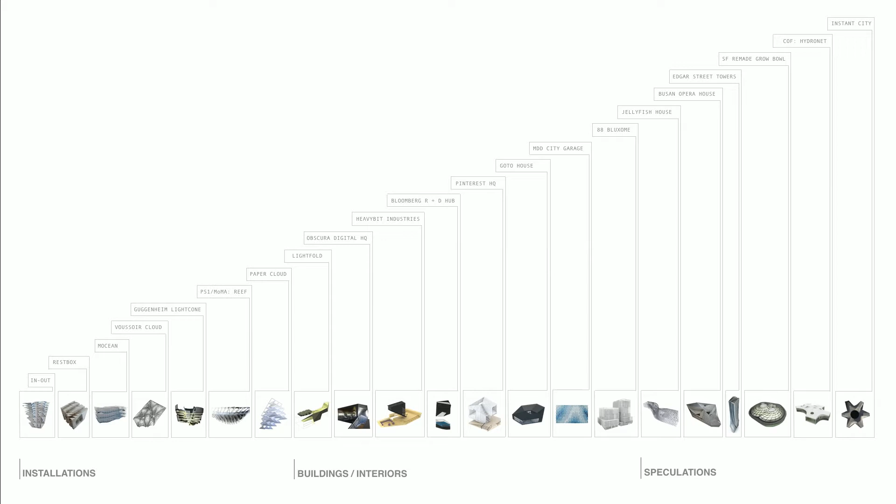And at the other end of the spectrum, the speculative projects, which gave us a chance to experiment with spatial and formal ideas which we didn't have a chance at that time to realize in built work, as well as larger scale urban proposals. So those two forms of research are now making their way into our buildings and interiors projects. We'd like to talk about 5 of those projects.

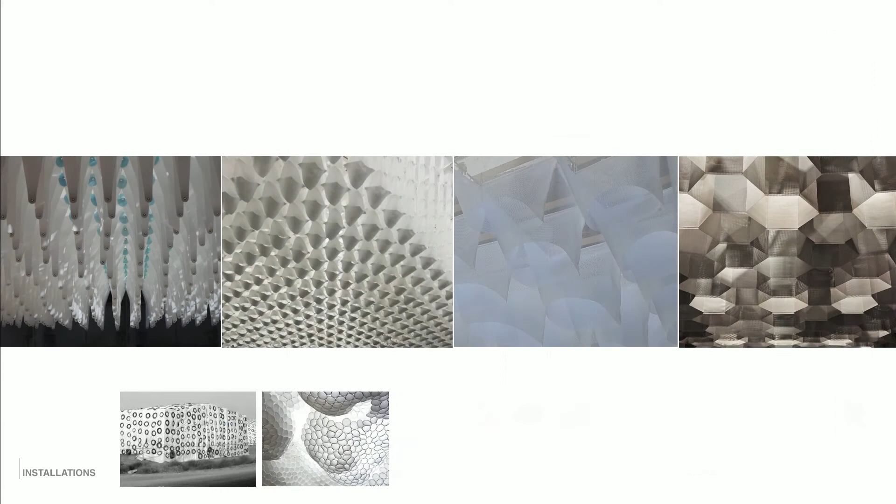We've reorganized them a little bit for some conceptual alignments, and then if we have time, talk about a speculative proposal. So in terms of our installation work, there are really two lines of related research.

One having to do with how to make thin materials volumetric, as well as have a perceptual depth. Here we're interested in using really commonplace materials, things like mylar, 8.5 by 11 pieces of paper, and netting, as a way of defamiliarizing the familiar.

So 8.5 by 11 paper becomes voluminous. Something as simple as insect netting can appear rigid. And the second line of research is thinking about structure and rigidity through folding.

That works at both the level of how the part-to-whole relationships work in terms of aggregation, and also down to the level of detail.

Within all that, our conceptual goals have to do with how to think about how the aggregation of these pieces come together as a holistic, more synthetic form, and also how the material can begin to defy and confound some of the expectations one might have.

So, for example, the voussoir cloud, a vaulted compressive structure made out of super lightweight material, sometimes through its geometric deformation appearing like a solid block, and other times a light translucent material.

So with the building projects, this is for the Bloomberg R+D Hub. It's in a way the opposite of the voussoir cloud project, in that we were looking at lumber and how to think about lumber in a number of different ways. Very much like the fabrication research, which centered around paper and lightweight materials, the construction industry is also full of flat things like plywood, MDF, and veneer.

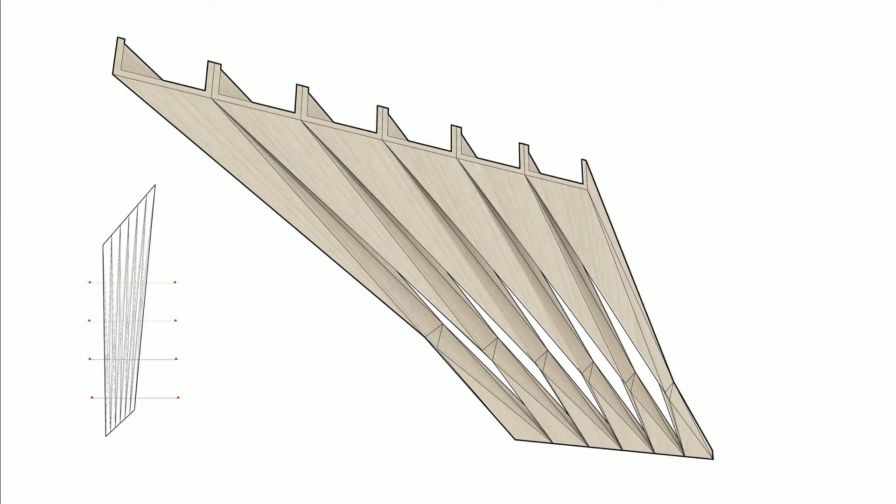Here we were interested in lining the room with lumber. This is actually made out of a single tree, transformed at the ceiling plane for this long span, really trying to reinterpret the beam so that it could become both a surface and become porous. In cross-section, it transforms from a rectangle to a triangle, allowing it to become a surface which meets the vertical surfaces of the space, as well as allow for porosity inside and some structural depth to span across the space.

This is also a practical application, so we're trying to combine some of the pragmatic concerns of building with this line of digital fabrication research. This becomes the mechanical louver for the space above, and spreads out over the guard desk.

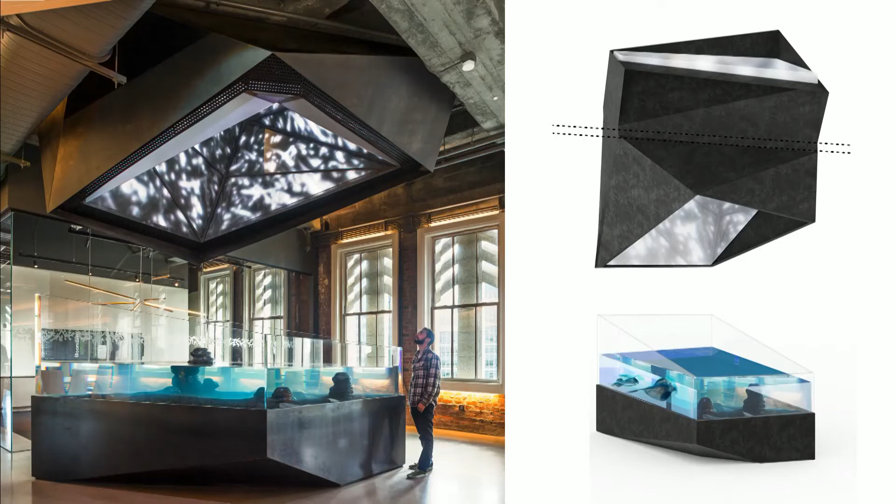That same geometry, the four-sided element becoming a three-sided element, we explored in a different way with the aquarium and a data feed display that translates from a parallelogram to a triangle at the top through the cut in the floor plate. It becomes a work bar at the top, and here we're able to see the geometry of the fish tank below.

And the triangular space above, forming the interconnection between the two floors, and then the live feed data, which is then abstracted to become the visual information on the interior of the space.

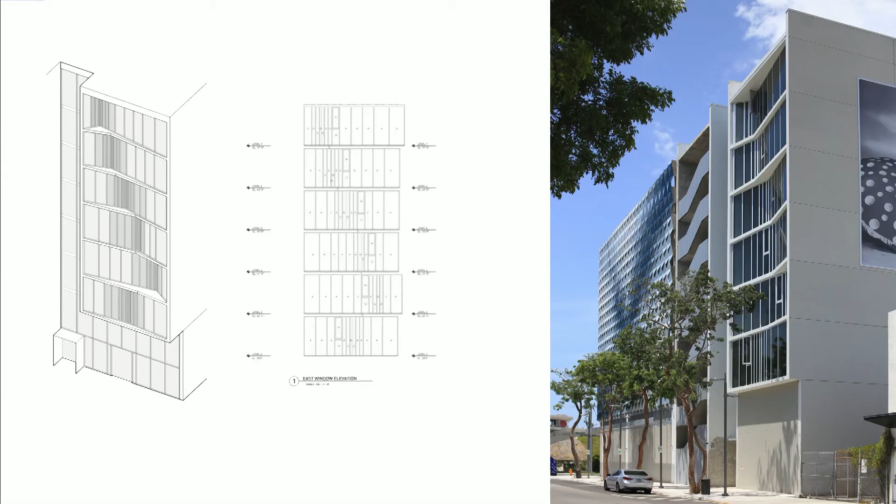For the Miami garage, it was a more direct connection to the aspects of structural folding. Here we were interested in making a kind of hybrid structure surface with the skin, in this case through aluminum panels. The project took on three components: the skin, the stair, and the small boutique office space, re-employing similar geometries of the chevron and the simple facet, which translates up through the vertical facade of the office building to create a bit more of a dynamic aspect.

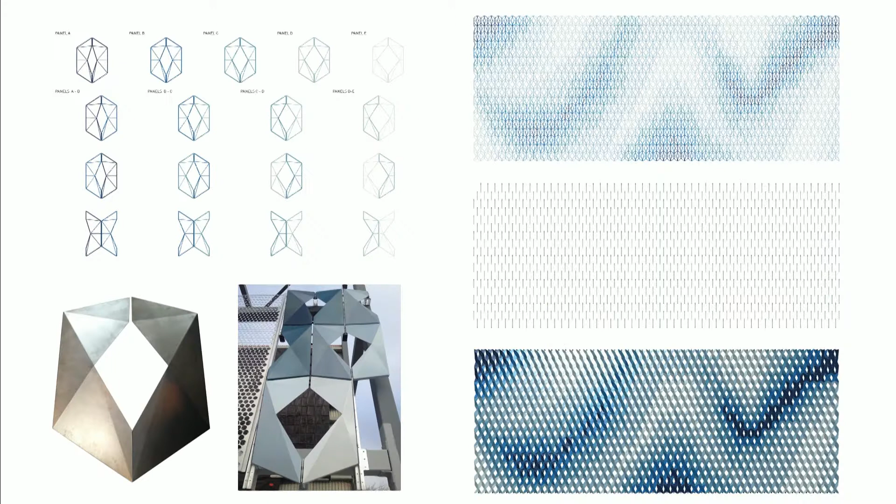Yet again, using really common materials such as simple storefront and exposed slabs. And in the case of the garage facade, using the folded aluminum panels to create the porosity needed for ventilation, as well as an overall mural that could reflect a bit of the Miami sky and the idea of the coloration of that city.

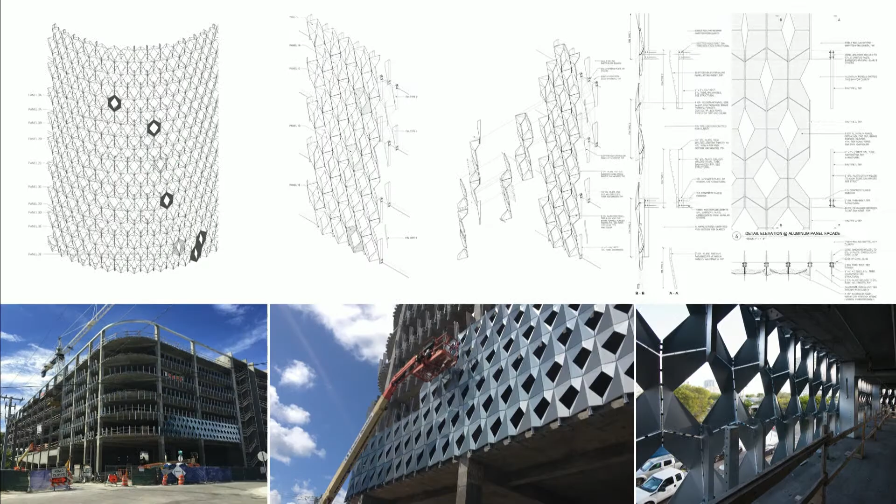There are five panel types, each with a different porosity, and those porosities are arrayed over the different floors, so that in aggregate they were able to achieve the percent openness needed for the space.

In terms of the hybridity of its structure, one of the things we were quite adamant about was not having panelization such that the structure was revealed. So there was an offset grid, cantilevered above and below on the slabs, and then the panel itself takes the load from the center of the span of each floor, translating it to those spars that extend off of the slab. In that way, when looking through it, there's no exposed structure — it seems more like a single piece of fabric, or a single brushstroke across the face of the building.

And then it changes quite a bit with light. So in thinking about thin surfaces and volume, we try to do that at every scale of project, with every kind of surface. It's something we see many times in the construction industry: the flatness of the skin.

This project was actually quite restricted in terms of its dimensions, from the edge of the slab to the property line — only about 8 inches on one side and 14 inches on the other. But even within that thin depth, half of which is structure, about 6 inches, we were interested in creating a surface that could change through perception and the way someone would look at it.

So sometimes appearing more sculptural, sometimes appearing more flat, sometimes appearing like single lines of planes, and sometimes an array of the panels themselves.

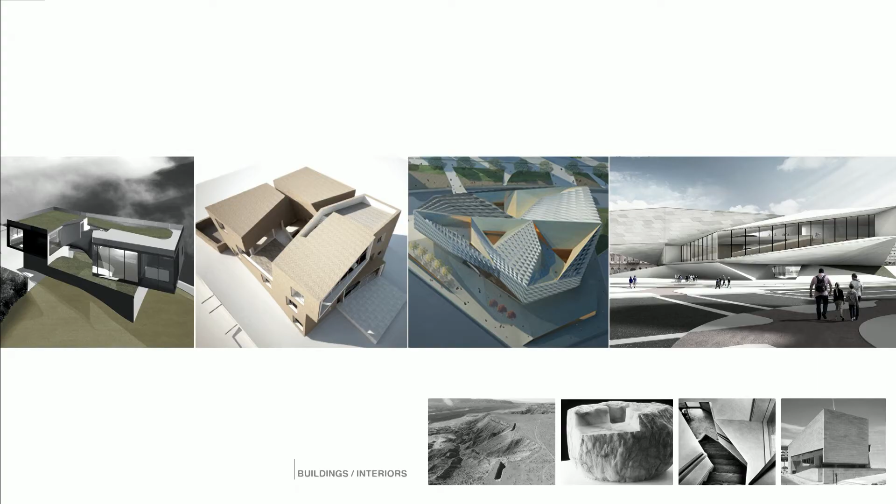With our building projects, we have a different approach — we like space too. So in our building projects, we tried to connect some of the spatial and formal ideas we've been struggling and grappling with over the years with our material strategies.

The fog house, shown on the image on your left, is the very first project we did together as an office. Really what it is, is the strategizing of negative space making through intersection. The double negative, which serves as an inspiration, is the idea of two voids which intersect to create a third condition through that quality of intersection that could not be predicted — an unpredictable result given the nature of the two original volumes that were intersected to create it. We tried to think about how to bring that attitude and that sense of space making into each of our projects.

We've done that in limited ways with elements of different schemes, and the scheme that I'd like to talk about is for Pinterest, which was recently completed early last year for the Pinterest headquarters there.

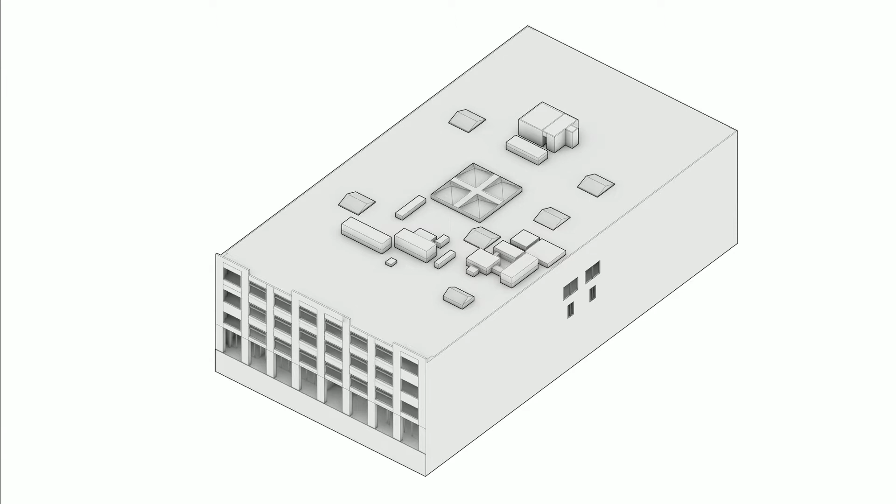This is an adaptive reuse of a John Deere factory, a purely interiors project. The building had been renovated at one time, sometime in the 1980s, and that renovation included a light well that traveled down to the second floor. It's a building incredibly limited by light, with only light on the two far edges, leaving 200 feet of sides without any natural daylight. This became a really important element to the space.

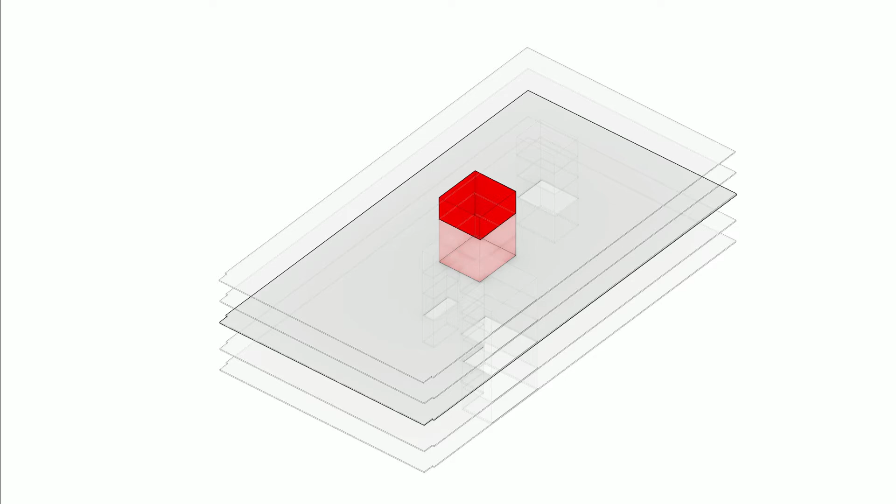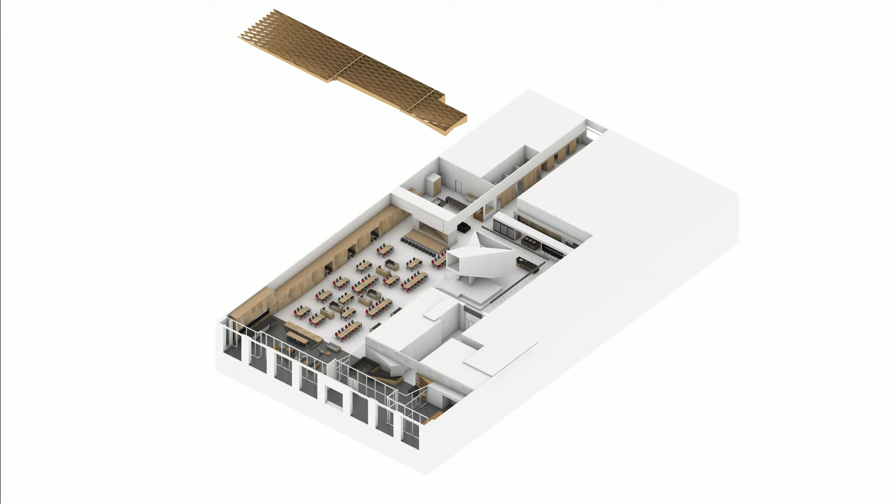What we chose to do is extend that surface through the atrium to the first floor, and insert a stair which would become the heart of the building and the method of vertical communication throughout. That then finds its way into the public space of the lower level, which is exclusively a social space, something we often find in tech offices as well. It wraps together with the circulation sequence of the whole building from the entry through.

So a few images of the entry, wrapping into the all-hands space, and then you're able to start seeing the stair in the far distance.

The stair itself is structured from three points: from the lower landing, from the upper landing, and then it's hanging off the back of the space. It's constructed of two layers of perforated material, each with a slightly different hole size, so that the overall moire is much more like a fabric—more like looking through a veil than looking at a geometric collection of things.

There are a series of apertures which travel throughout to allow for visual communication among the floors. One aspect of this stair is that it creates a double negative, but that also connects to a principle of Pinterest and their brand identity.

They use the term knitting, which is another way of talking about collaboration—for us, in a very formal way, the idea of two things coming together and creating this void in between, which is how the different pieces become knit together.

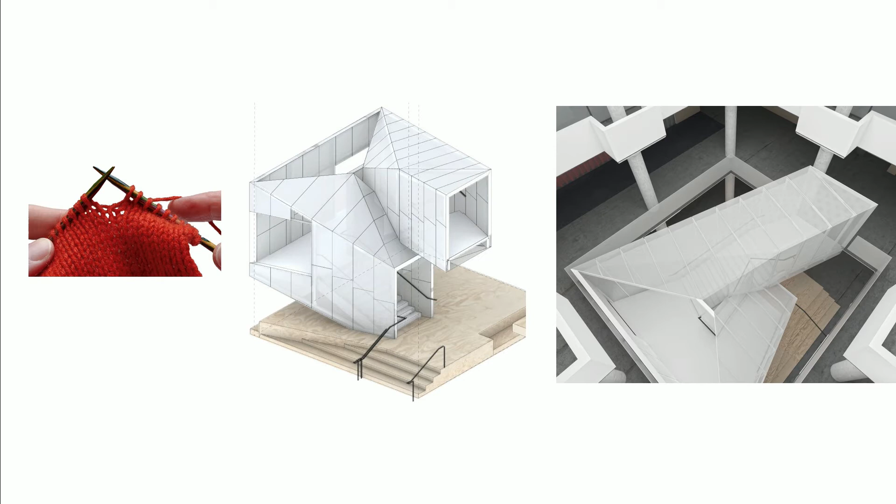So that is how we began to think of the stair as these two needles that could overlap and create this small void between. Inside that is a small prism, the overlap of those two spaces, which allows for visual communication, not just from outside of the stair but also within itself, seeing through those layers of material down to below.

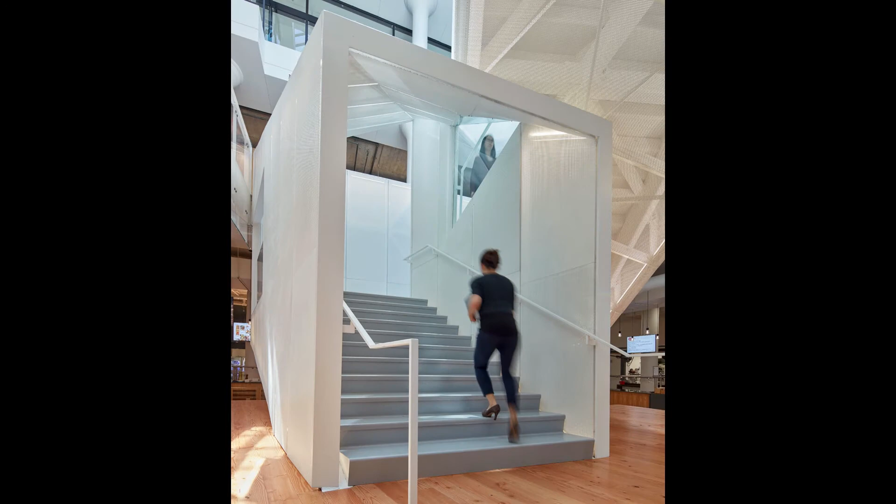In really every instance, you re-encounter it in multiple forms, both as a negative and as a positive from looking up above. The stair emerges as this kind of portal at the second floor and rises up to define the heart of that social space as well.

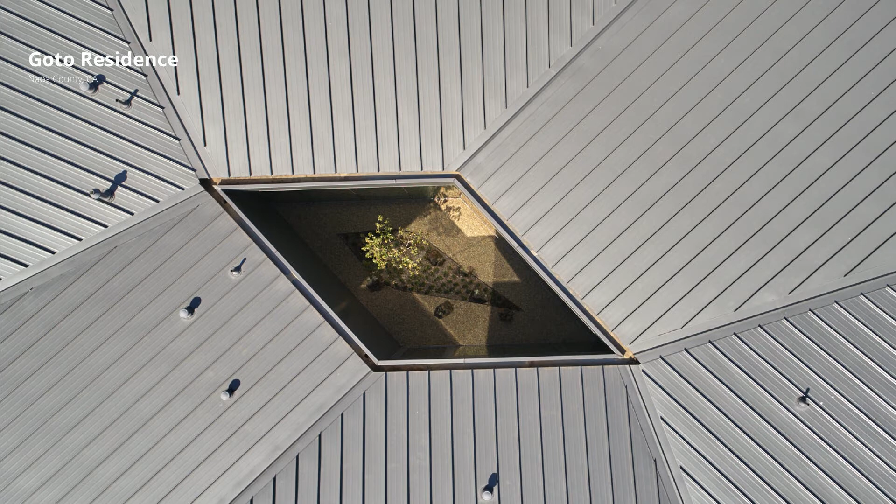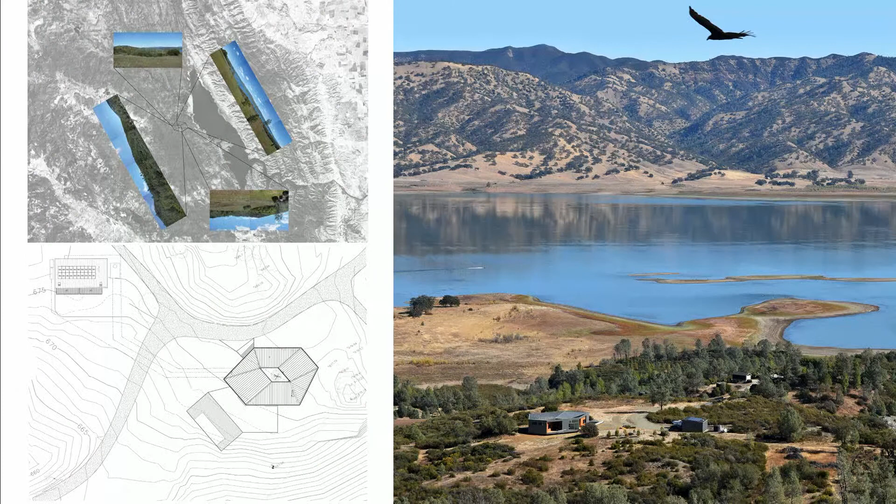This project, though it started before the garage and finished after it, and though we didn't set out consciously to relate them, has an interesting corollary with that Miami garage in terms of the underlying geometry of the module—essentially the same premise, where a 6-sided figure is translated to a 4-sided void within. The nature of that underlying geometry follows the idea that a conceptually simple device can yield a perceptually complex result.

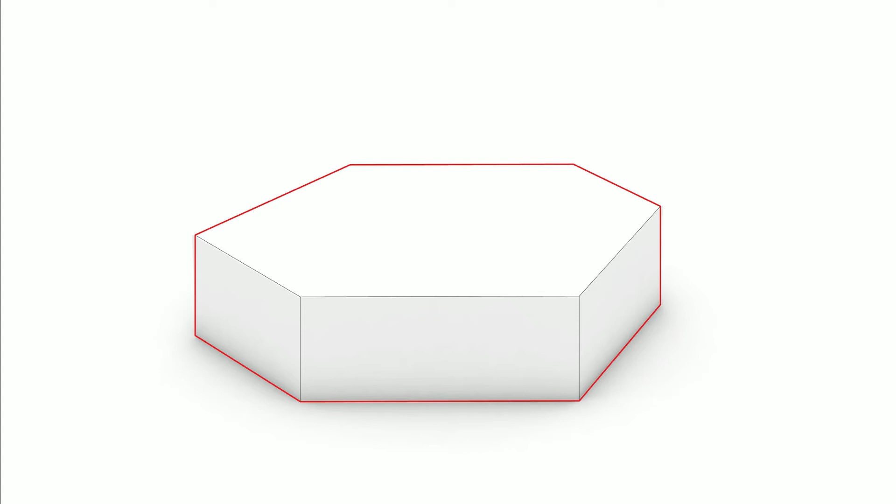The site is on the eastern side of the mountains of the Napa Valley, facing this man-made lake, Berryessa, with incredible views in all directions. Yet we didn't want it to be the cliché of the all-glass house looking outward equally in all directions, but instead confounded that with an equal attraction towards the inward space of this central void.

At the same time, there's a kind of programmatic setup whereby the client wanted these four different spaces, but not to have them too separate from each other—just somewhat separate.

That geometry was adapted to accommodate these 4 simple boxes, which then get connected by trapezoidal interstitial deck spaces between them.

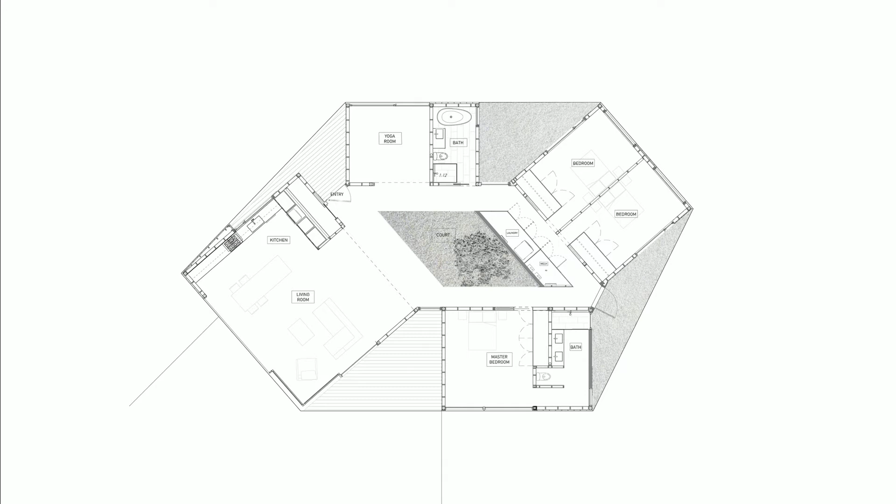So the plan looks like it would be easy to build, but in section it becomes a more complex thing, because all the boxes are scaling differently to accommodate their different programs and to address the surroundings differently.

This condition of unstable soils led us to a thickened mat slab as a solution, pretty different than the typical California pier-based foundations used to deal with seismic issues, which usually include a lot of piers into the ground. In this case, the slab being that thick allowed us to taper it up around the entire perimeter and get this sense of floating on the terrain, which we were really after.

The site's quite rugged, and for the house there was a desire to have this sense of it having arrived on site from somewhere else, but at the same time be very much adapted to and rooted in that place.

So as you come in, you perceive that void as an object upon entry, and it bifurcates your path and view with the circulation that wraps around it.

And then the different inflections of this four-sided glass void produce an interesting effect of refracted light and reflected views that happen throughout the day around this central spatial condition.

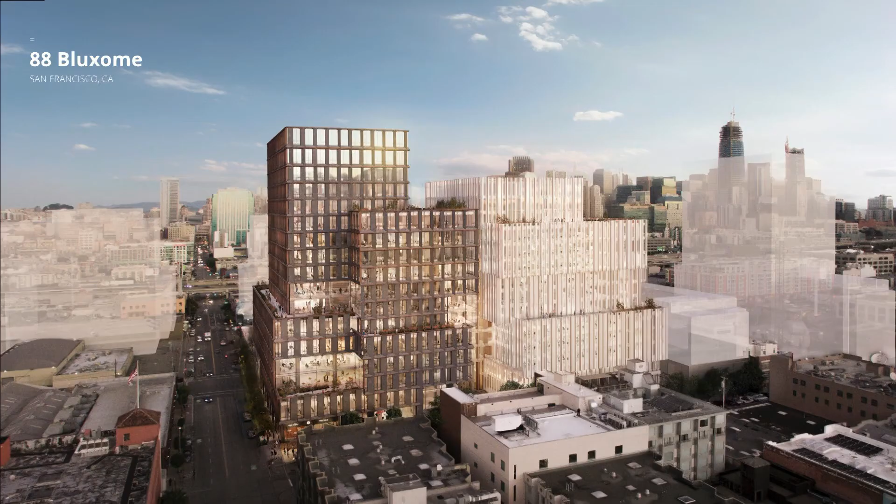So on a much different scale, this does revisit ideas, some of the things Lisa talked about with the installation projects, and an interest in thickening and deepening of an essentially very thin surface.

In this case, the kind of nearly ubiquitous unitized curtain wall that almost every development project these days seems to demand, and also a very onerous and demanding process from the San Francisco planning department and the planning code requirements.

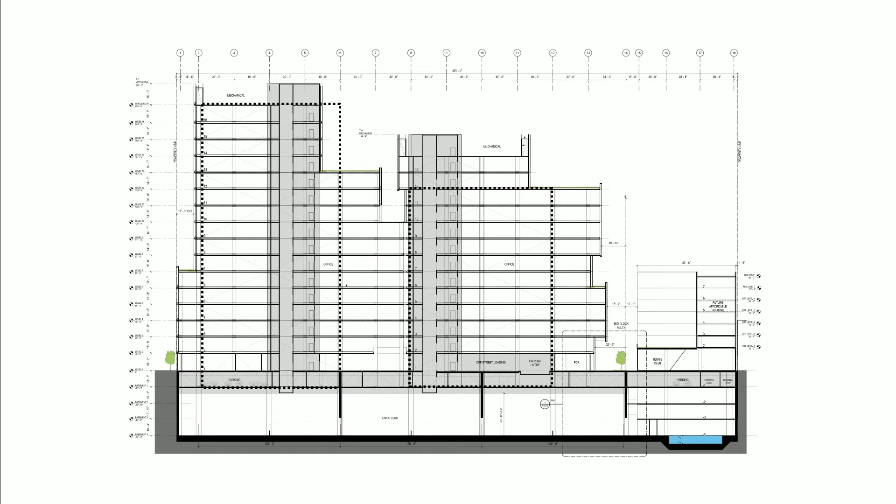So here we're looking at a diagram where on your left is what the planning code is asking for, through the device of a skyplane bulk reduction system that they adopted from Philadelphia's planning code, which is a kind of evolution of the New York zoning and planning ideas, and which essentially produces a wedding cake form if you let it—it's hard to get around that.

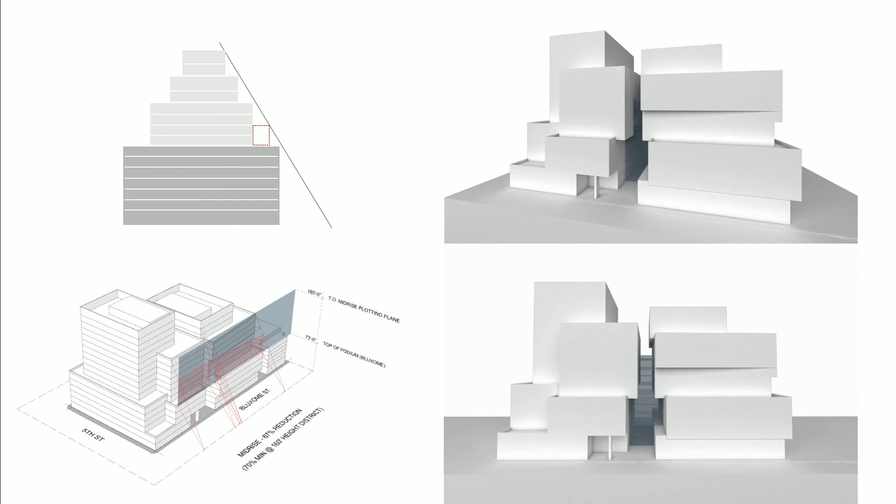But in addition, they are asking for a quite solid base and a more transparent top. And so we were resisting that simple response, a kind of oversimplification of such a complex and large-scale project.

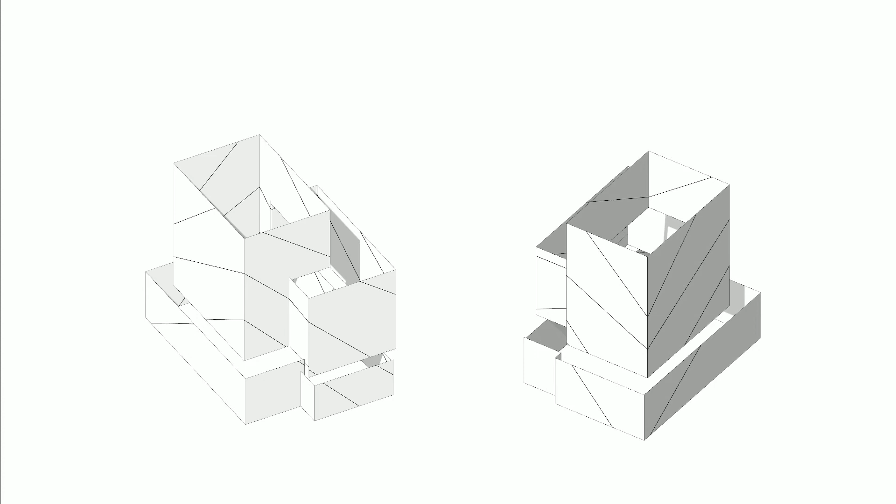Therefore we adopted this idea of a modulated, thickened surface, and these are some diagrams of how it maps around one side of the project and makes its way around according to how this project sits in the city, and according to issues of heat gain and so on. So these thickened surfaces have a gradient to them in terms of their directionality and opacity and transparency percentages.

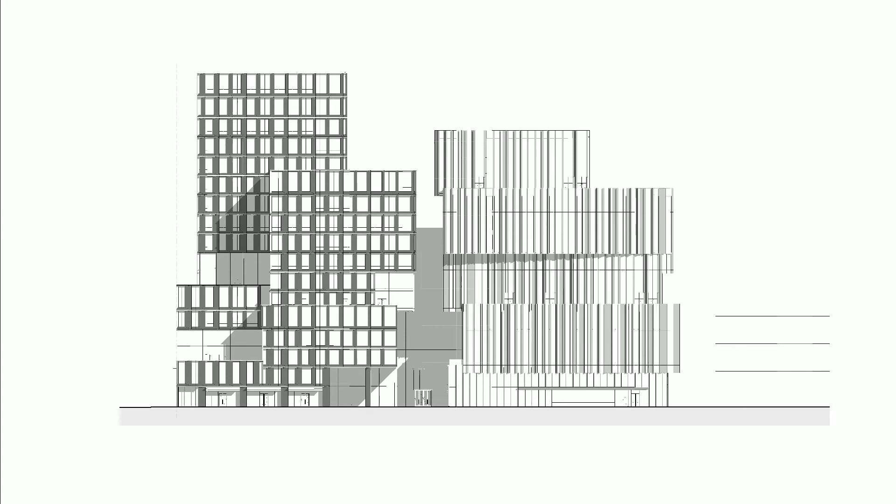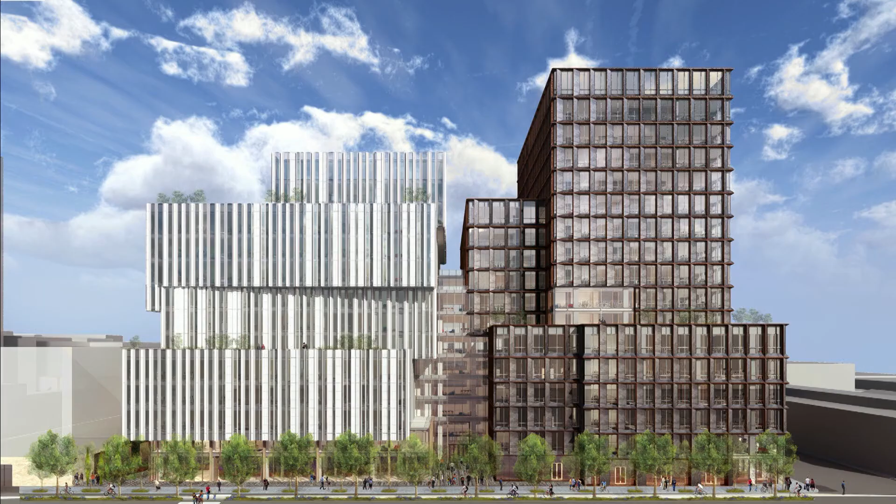And the other aspect of the project was that there is likely to be a phasing of it into two, and rather than simply give what is asked for—what almost every American planning department these days wants, which is to break down the massing and mix up the materials.

Those are the kind of comments you hear from almost every planning department in this country. We thought of it as an opportunity to do that in a different way than we typically see in our city, and the phasing and logistics allowed us to think of these as quite different buildings, kind of odd siblings in a way.

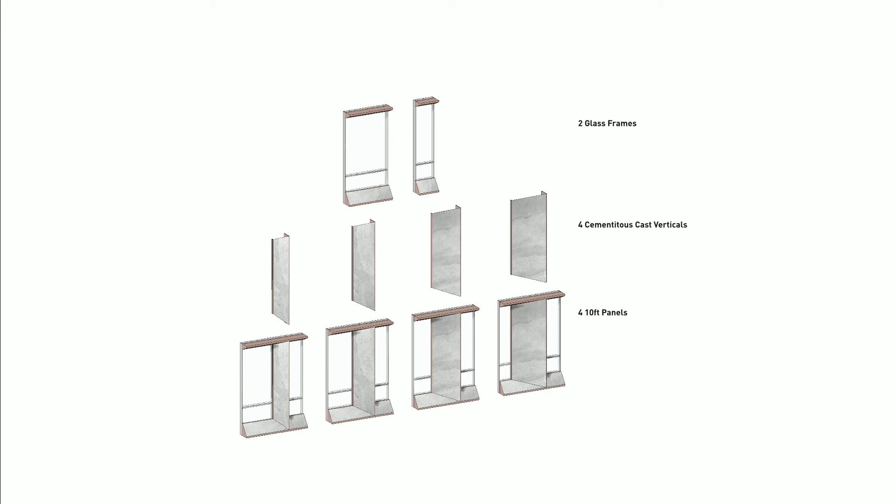This gets at, through diagrams, some of the ways the unitized curtain wall in this relative thinness can achieve a kind of perceptual thickness or perceptual complexity in terms of how it changes substantially as one engages it from different viewpoints in the city.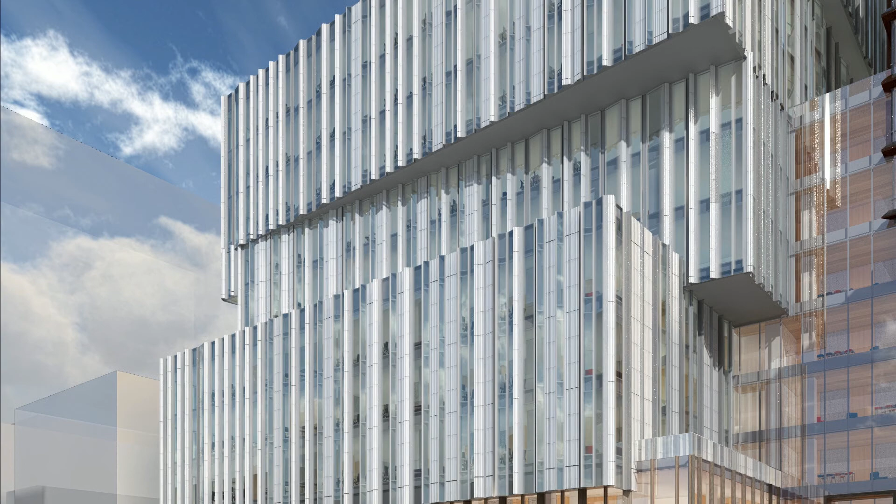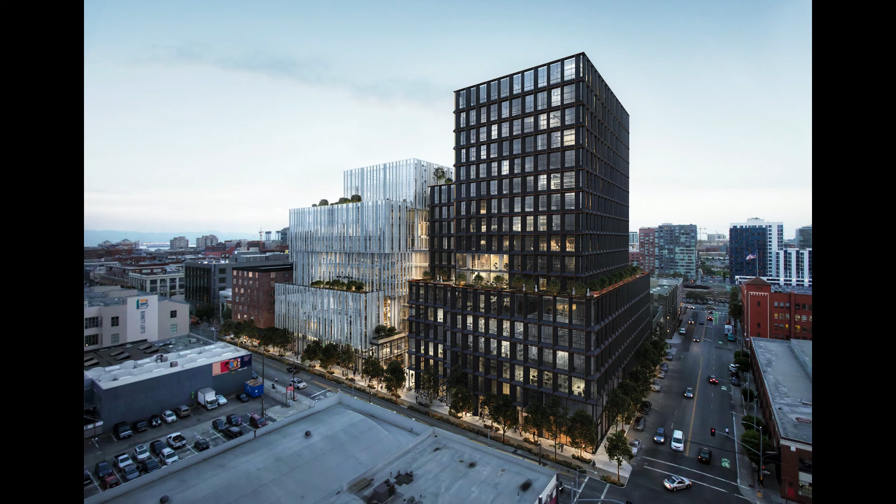That building we refer to as the tower, and this one the Vale. They're both using various cementitious products, terracotta, and other panelized products that are kind of off the shelf, but trying to use them in a bit of a defamiliarized way.

So another project that is in the same neighborhood. This, by the way, situates our office, which is at the bottom of that slide, in the context of this area of San Francisco. Also CCA, where I teach, you can see outlined there.

Some of the developments, even though the city's quite built out, there are some rapidly changing pieces of the city still. The Warriors Arena and the Uber headquarters are down the street. We're dealing with the site here, which is the last buildable parcel in Mission Bay, the blue piece.

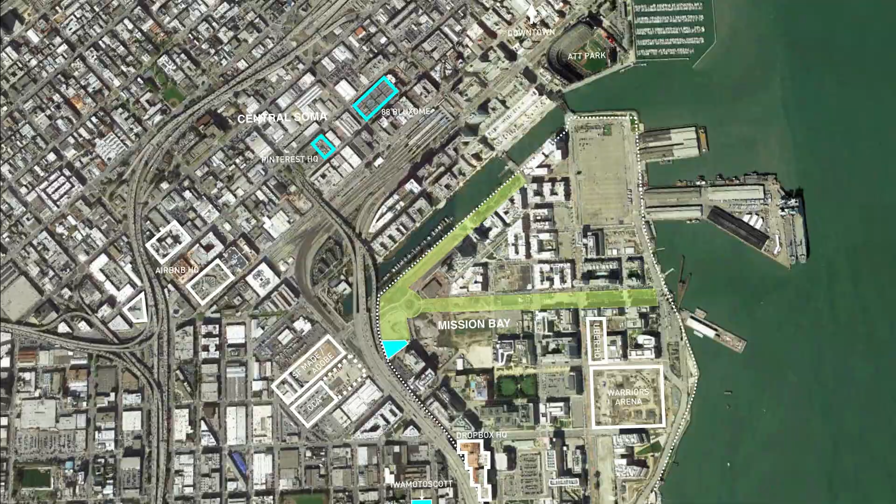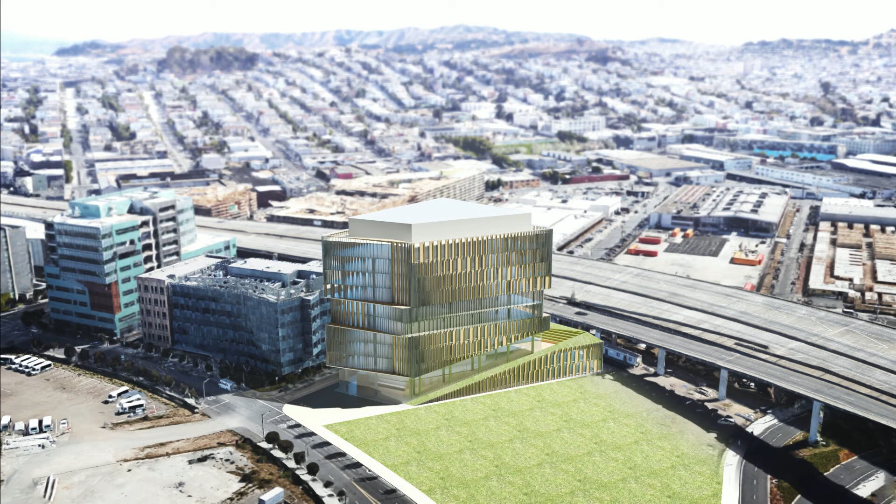It has, like the Godot house I showed earlier, a kind of potential as a building in the round to engage this incredible view in multiple directions, but also through the device of inflections and thickening and deepening of surfaces, a way to try to engage the viewer at these different speeds.

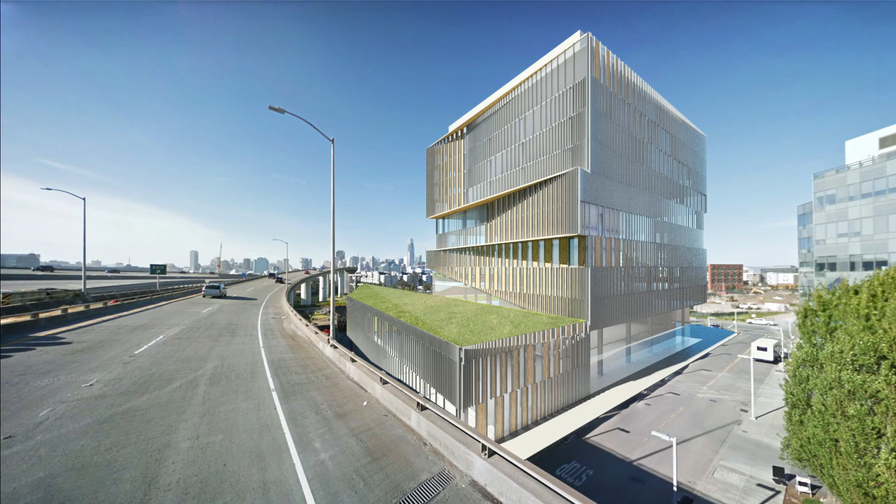It happens to be up against the freeway, and the city is expecting a building that acts as a kind of gateway to this view, on top of the typical ask of the broken up massing and the mixing of materials. And lastly, just a few more images of that.

This is a brand new project, so it's just kind of in the early stages.

Lastly, I just wanted to touch on the speculative projects that Lisa mentioned in the setup, which we've done over the years. They've often had a brief of having to think forward and look towards the future. That's what was asked in almost every one you see here: the Jellyfish House, the City of the Future competition, the Edgar Street Towers, and the Tallinn Architecture Biennale.

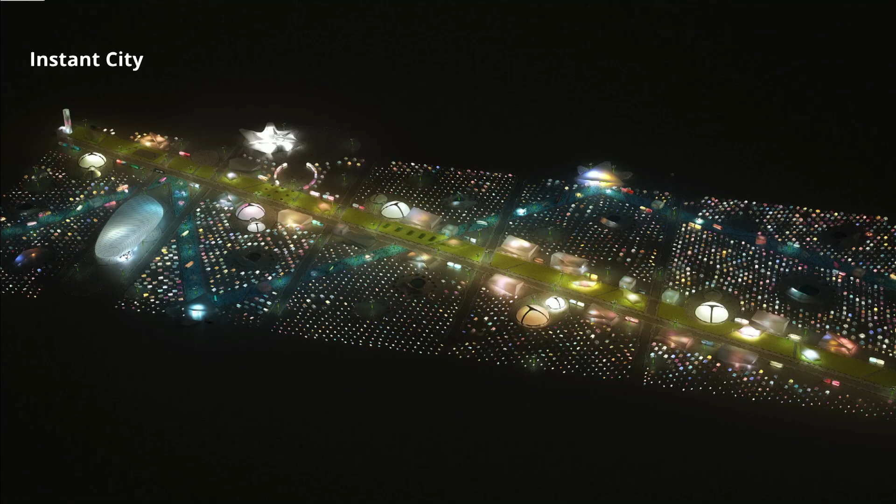They're dealing with a kind of urban scale that we were lucky enough to move forward into a semi-real project with an unnamed large tech company that we worked on for a couple years. The ask was basically to try to reach some version of a combination of managed and fortuitous indeterminacy that you find in a place like Burning Man.

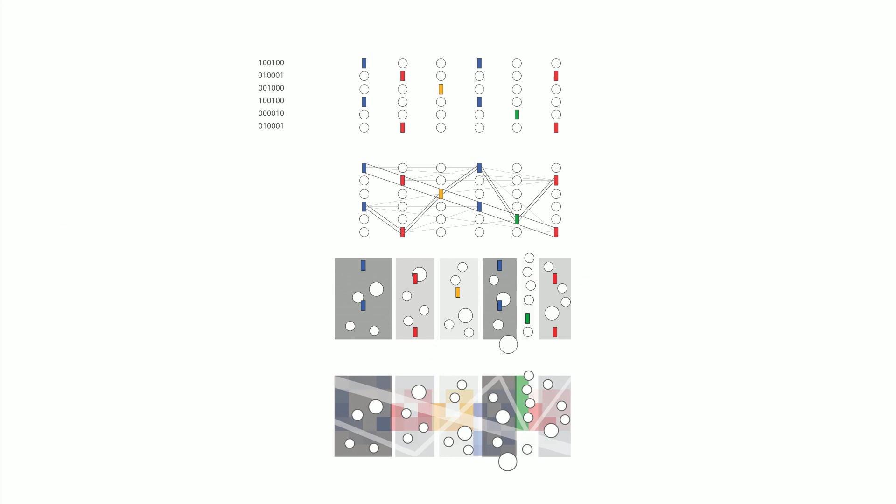They wanted to think about the possibility of making their own version of an instant city that would recur as a place to dream big and so on, and have this built into the moonshot culture of the place.

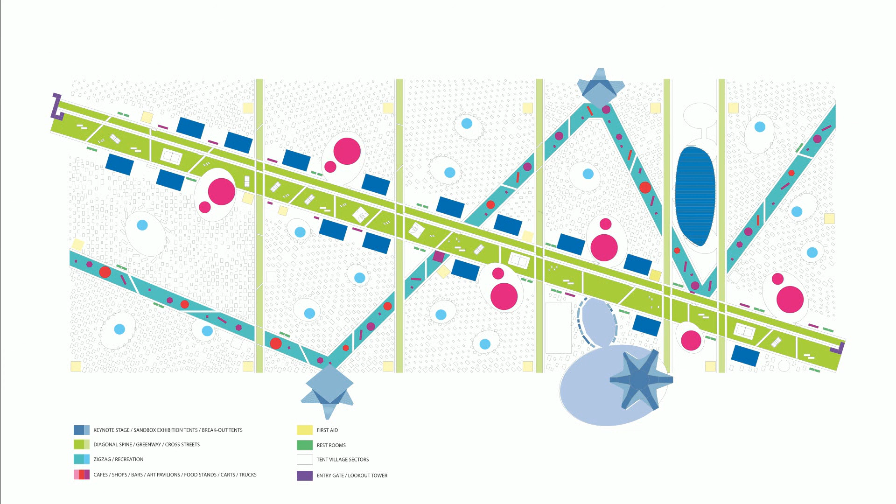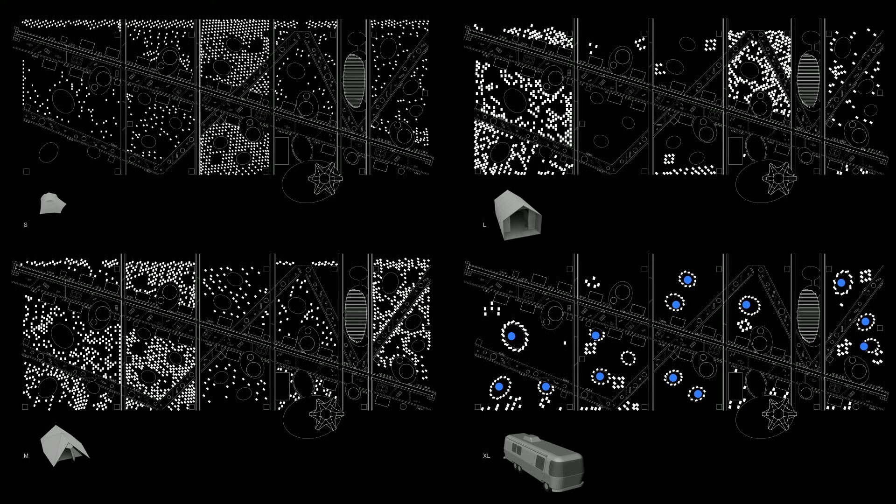So it's about a kind of binary translation, a very simple idea where the logo becomes a giant scale code that can then feed into the housing of up to 100,000 people on a temporary basis, in all these different modes of temporary housing.

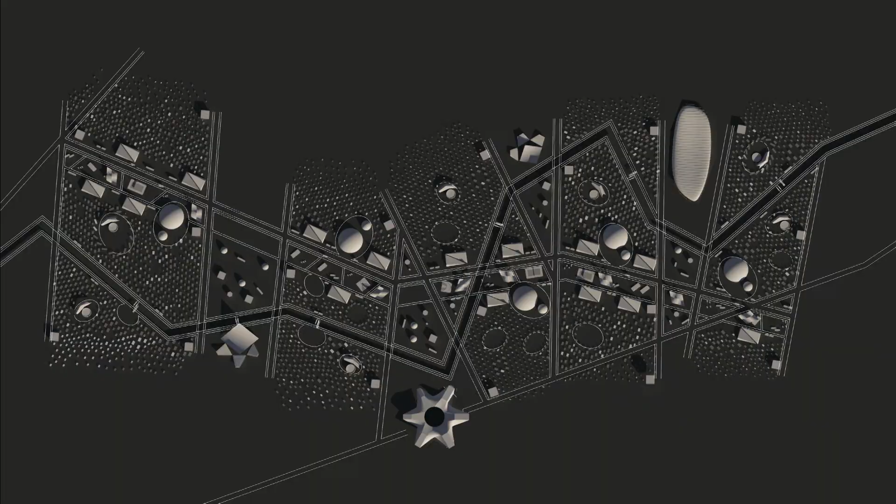It could also have a kind of pure state on more tabula rasa-like sites, and a more adapted state on more complex sites. These are a few images of how that project played out and evolved into a much different kind of project over the course of time.

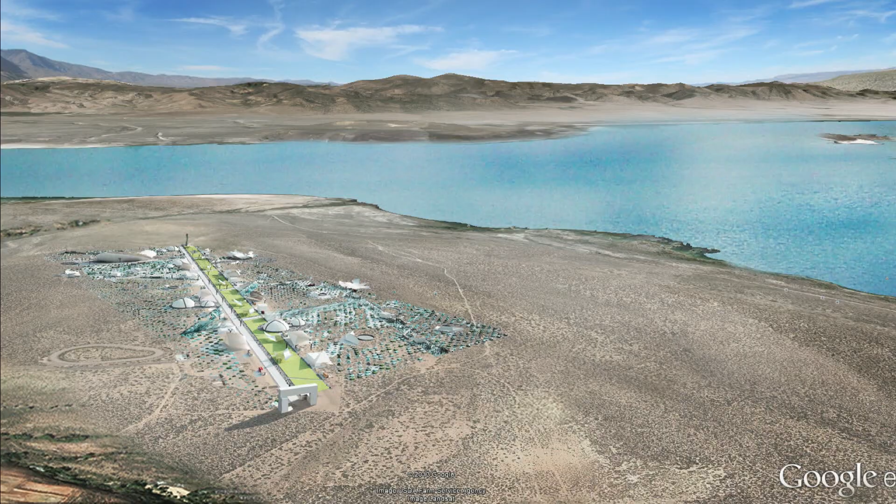This is some of the stuff from before NDAs were involved, the rest of which we can't show.

I want to end on a project we're just diving into, where we're taking a city block of San Francisco and combining ideas of Los Angeles' small lot development notion, where single family houses start to approach the density of multifamily densities.

Also, from the developer's interest in incorporating ideas of the elemental housing projects happening in Chile and other places, it builds on the notion of a managed yet fortuitous indeterminacy, built in this case into an urban condition and a block of the typical San Francisco single family fabric which surrounds this block.